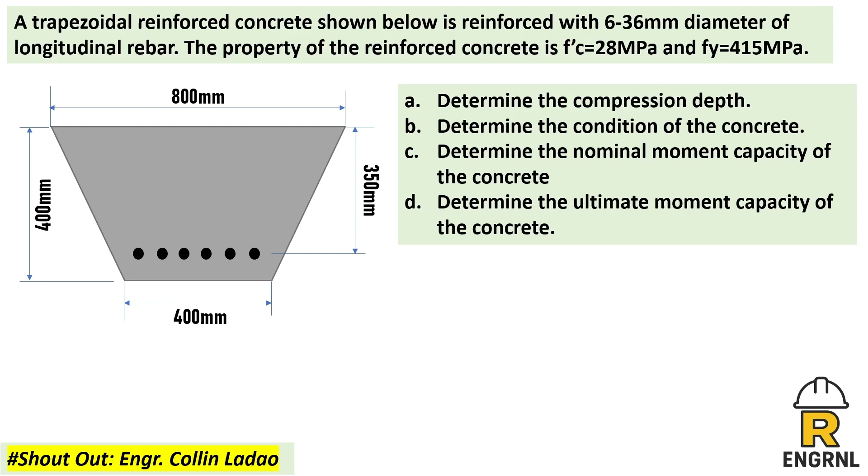Challenging ito, bro, pero sagutan natin. Una muna, kuwentahin nga muna natin yung AS. So we have 6 bars na 36mm, so we get 1944 pi. You can calculate using calculator.

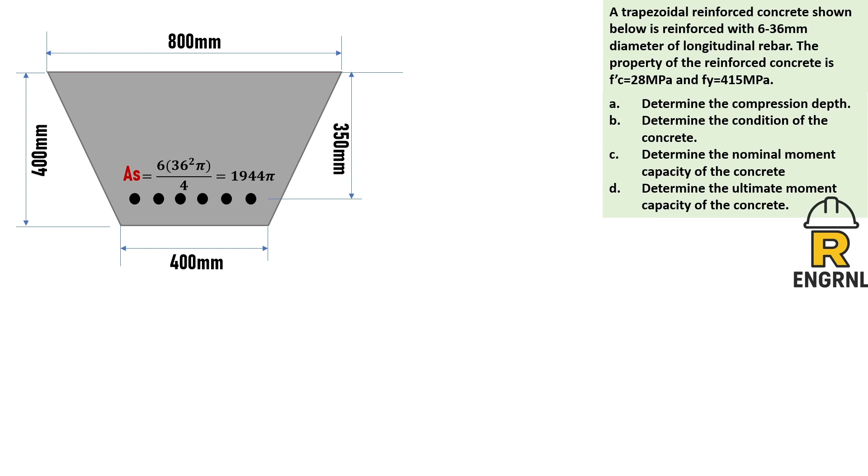Tandaan natin yung konsepto na kailangan mag-equilibrium yung force C at saka yung force T. Tandaan natin, meron tayong concrete block. Palagay natin itong shaded area is your AC, o the area of concrete. Dinra-drawing natin ang stress diagram. Itong concrete block na ito ay may height.

Yan yung hinahanap, yan yung compression depth. So we have this stress diagram, the concrete force o ang concrete stress, na may 0.85 F'c as stress. Yan yung ating compression force, is equal to the area of concrete multiplied by the stress of the concrete. And the tension side has its T equal to AS times the stress of the steel. Tandaan natin yan, from force over area, also stress. So equilibrium dapat yan.

Now for you to have the overview of the steps, we have 3 general steps for this investigation problem. Una, equate mo lang yung C is equals to T. Summation of forces along the horizontal is 0, equilibrium sila. So C is equals to T, tapos equate mo lang, substitute mo yung mga values natin: AC times stress C is equal to AS times stress S.

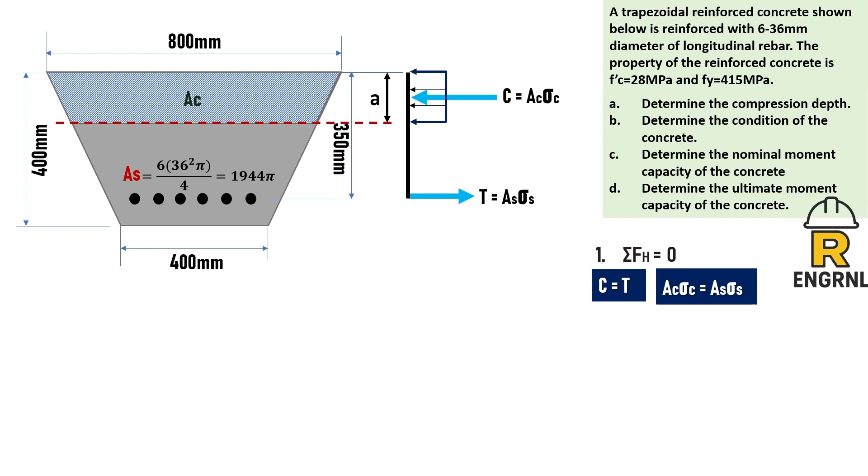Next step is to check whether your steel is yielding or not, by checking Fs. Kung rectangular beam yan, ginagamit mo itong mga analogies: kung Fs is greater than Fy, ibig sabihin steel yields, pwede mong gamitin si Fs as Fy, o Fy as Fs. Stress ng steel nga pala yung Fs. And if not, Fs is less than Fy, hindi siya yielding, so you are using the actual Fs or the actual steel stress.

Pag non-rectangular ang ginagamit ko, pwede akong gumamit o mag-assume na nag-yield agad ito. Pwede nating i-assume yun and find the height of compression block A, then check your Fs. Kung napatunayan na natin na nag-yield lahat, pwede kasi siyang maging transition region or tension control. Yun yung tinatanong sa letter B, anong condition yun. Mamaya i-check natin.

Kapag na-finalize na natin yung checking, ready na tayo to get our MN, yung letter C, using the moment equation, or taking moment at any point of C and T. Kunin lang natin yung moment arm dito and then taking moment. Yung moment arm ay D minus Y bar mamaya. Pwede natin gamitin yan either sa T o sa C.

Now let's do the first step. Nakalimutan ko, kapag MU, ita-times mo ng reduction factor yung MN para ma-solve yung letter D. Okay na, ready na tayo, simulan natin sa step 1.

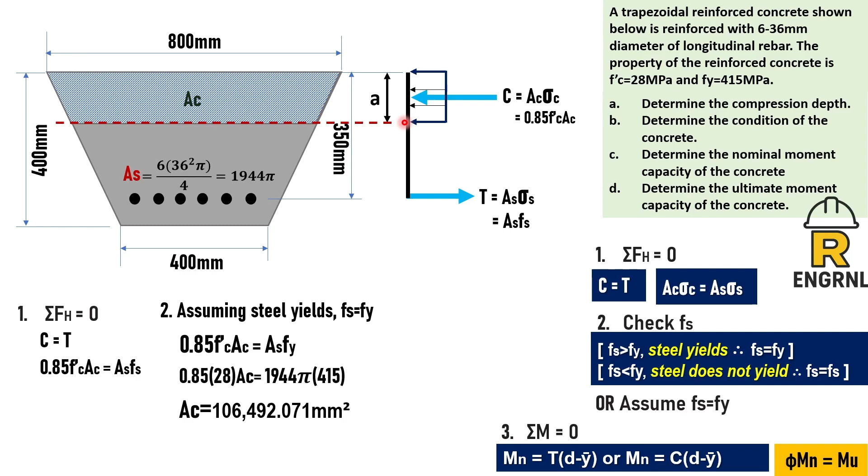I-evaluate natin ngayon ito. Using geometry, pwede natin siyang makuha. Tignan niyo lang mabuti itong gagawin natin. Ang goal ko ay makuha yung A, ang depth of compression block. Tandaan din natin na nakuha na natin yung value ng AC as 106,492.071.

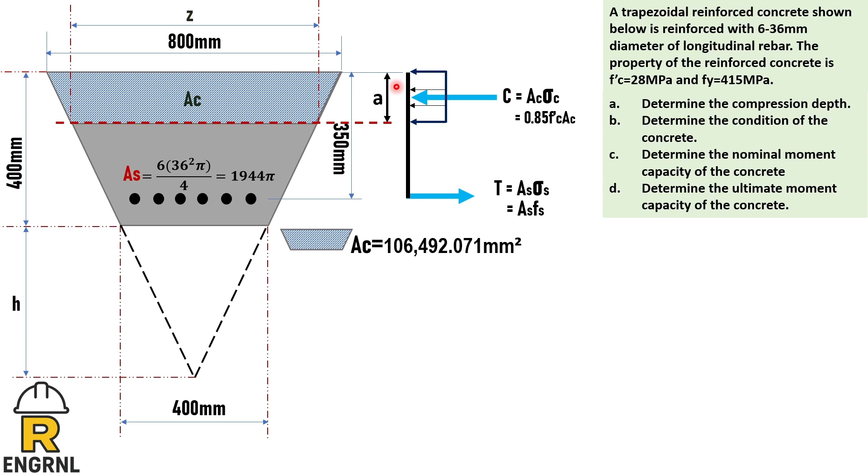So I want to get A. I'll do similar triangles first, solving for H first. Let this yellow color be the whole triangle. So this whole triangle has a height of 400 plus H, and its bottom is 800.

Next, I assume this violet triangle, which is similar to the yellow one. Its height is H and its bottom width is 400. So we can do similar triangles from these two triangles, and that's what we get.

So, 800 over 400 plus h, the ratio of the width over the height, is equal to the 400 width over the h of the violet triangle. Later on, we get h as 400 mm.

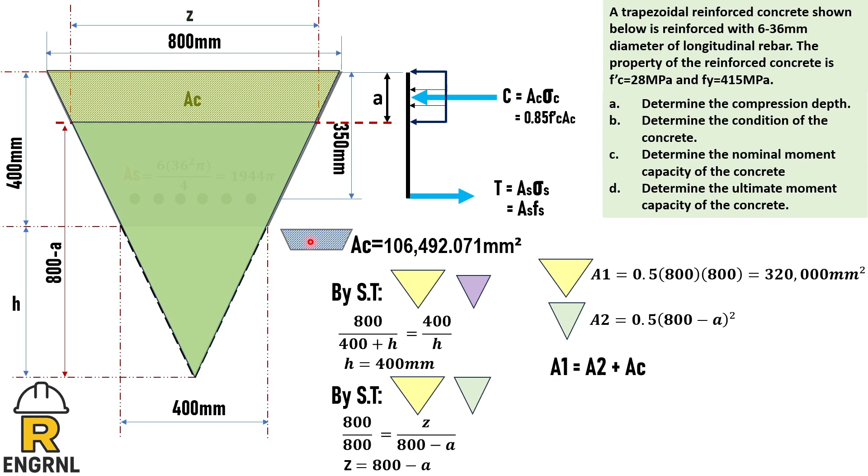So to summarize, this is the substitution, and now I only have one unknown, A. That is your compression depth, the height of the compression block. Did you follow? Yes, thank you.

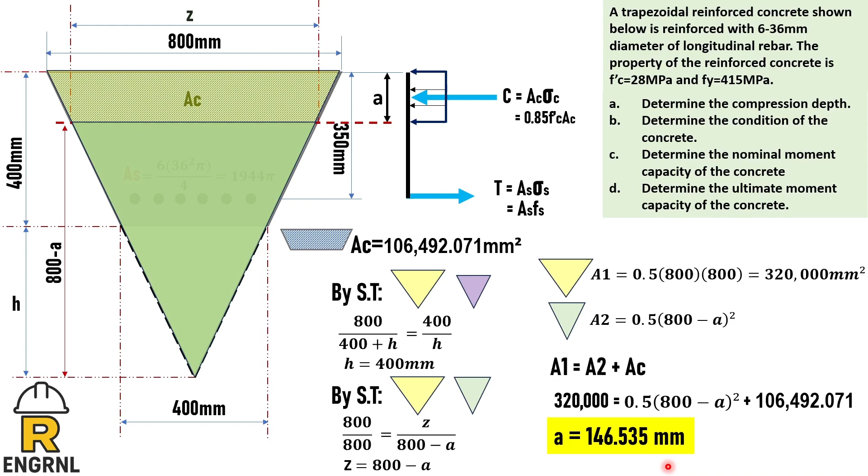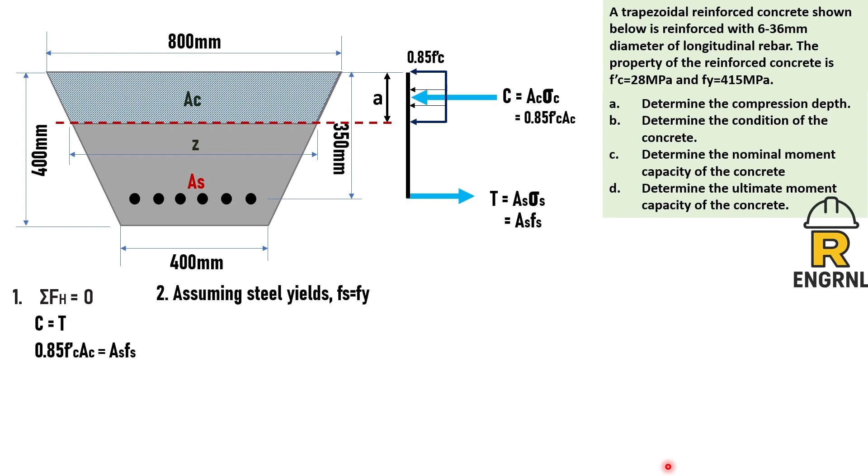So that is our compression block depth, A. Let's solve for A now. Let's check if our steel bars yield. We got A as 146.535.

Remember, we also have a formula here for concrete, C is equal to A over beta 1. That comes from A equals beta 1 times C, from NSCP 2015. So we can easily get C, and C is 172.395.

Now we will use C to check the steel stress, since we have a formula, Fs is equal to 600 times D minus C over C. If this Fs is greater than Fy, which is Fy 415, it will yield, and the assumption is correct. Let's check.

350 is our effective depth as given. This is the effective depth, from the centroid of steel to the outermost fiber of compression. So to calculate Fs, we have...

618.135. Obviously that is greater than Fy, therefore the steel yields, and the assumption is correct. Very good. So we don't need to repeat anything here since it yields, unlike when it doesn't yield, which gets a bit more complicated.

Now we also noticed that our Fs here is less than 1,000. According to NSCP, that is the transition region. When you're in the transition region, that relies on using a reduction factor. Actually we already answered letter B, determine the condition of the concrete, and the condition of the concrete is transition region. So let's proceed to the reduction factor since we can already get that. Why?

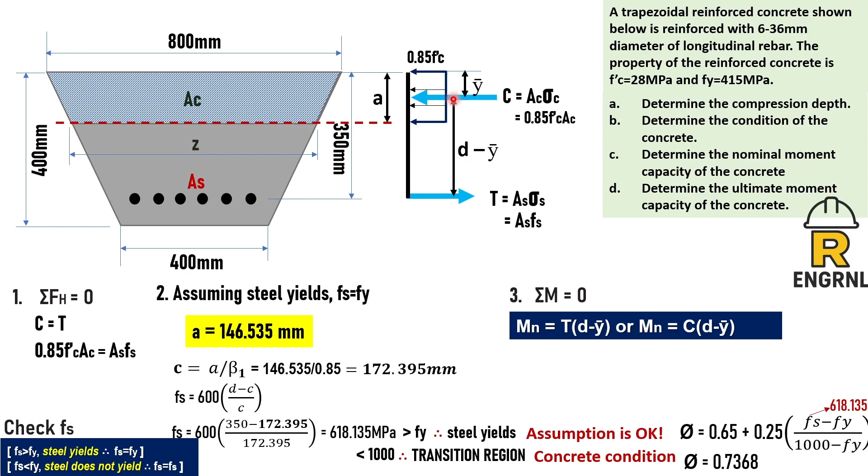Pagpalagay natin na yung pwesto ni C ay nasa centroid ng shaded trapezoid na ito, call it Y bar, wala sa taas, Y bar lang. Kunin natin yung Y bar mamaya. Tapos D minus Y bar ito, kasi effective depth to eh. Yung D is effective depth.

T times its moment arm, that is taking moment at C. So ang gagamitin ko, ito. I-substitute ko lang yung value ng T as As times Fy, since nag-yield naman na, nag-check na natin. So Fy na to, hindi na Fs.

Iwalay ko lang yung trapezoidal concrete block. Nakuha na natin yung height niyan as 146.535. Yung Z kanina is 800 minus A. So to validate that is 653.465. Meron na tayong legit na trapezoid dito.

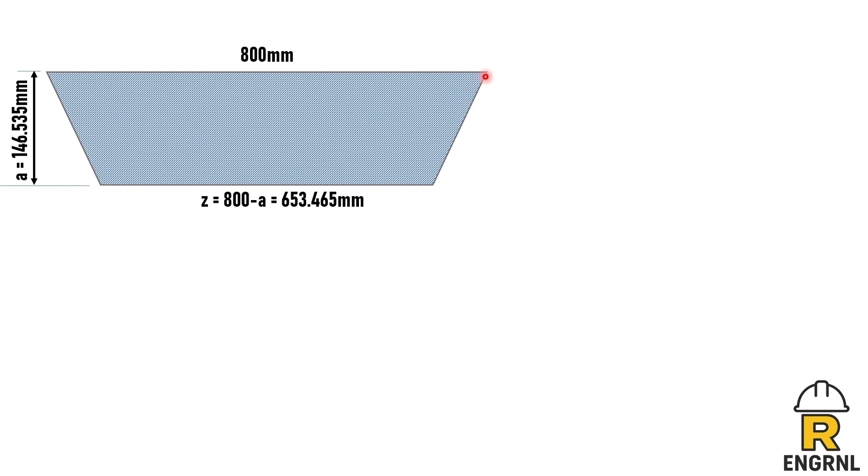Kunin lang daw natin yung centroid nito. Pagpalagay natin dito yun, yung centroid nun is Y bar. Bakit? Kasi kunin natin yung D minus Y bar mamaya. Kung meron kayong alam na formula ng centroid ng trapezoid, you can use that better, pero sakaling wala, we can derive for it.

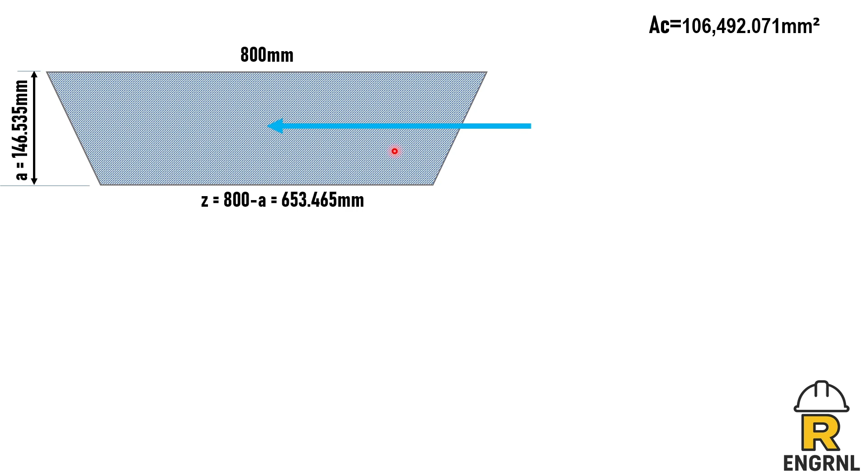Basta tandaan mo lang yung AC is 106,492.071, na nakuha natin kanina using the equilibrium equation. Tandaan mo na andyan yung centroid, dyan tatama yung compression force C. Tapos yung As, nasa baba yun, doon tatama naman si tension force. Basta yung C natin nasa Y bar position from the top. So this is your D minus Y bar.

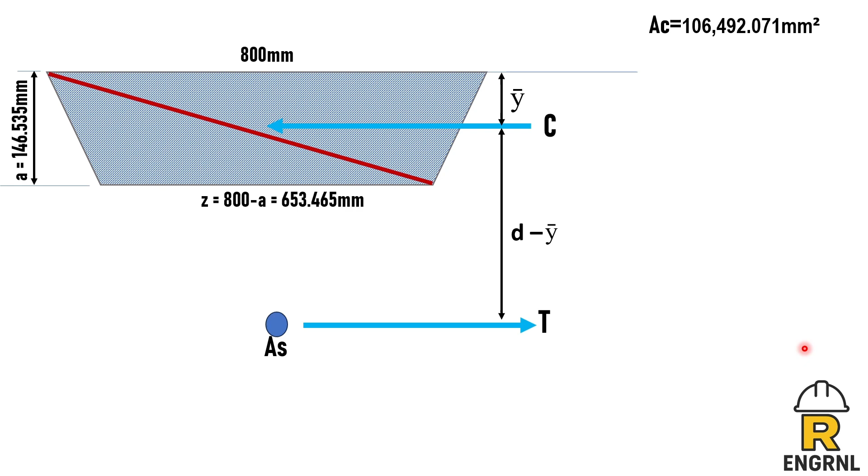Pwede ko tong ihati. Ganito ako manguha ng centroid ng trapezoid: hatiin ko sa dalawang triangle yung trapezoid na to, call it A1 and A2. Pero as one compression force lang kukunin ko, Y bar lang, isang centroid lang po.

Using Varignon's theorem, ang theorem na yon says that the total area times the centroid, yan yung Y bar, is equal to the area 1 times its centroid from the reference plus another area times its centroid from the reference. Yan yung Varignon's, we can use this. Basta tandaan mo na yung AC is the total area, and that is A1 plus A2.

Now, calculate A1. Tandaan mo, itong triangle na to, yung A1, may height siya, ito yung height niya, yung A, yan din yung height niya. Kaigihan na ganito yung pagkakahati ko, kasi given na yung mga dimensions. Ang width ng triangle is 800, so ang height niya is A. So we can use this formula.

1/2 base times height, 800 ang base, height is 146.535. So we have A1 of 58,614.198.

Ganon din sa A2. Ang kaigihan sa A2, kitang-kita mo din ang base mo is yung Z, tapos ang height mo is the same, 146.535 din. Property of triangle yan. So we can use 1/2 base times height din sa area 2.

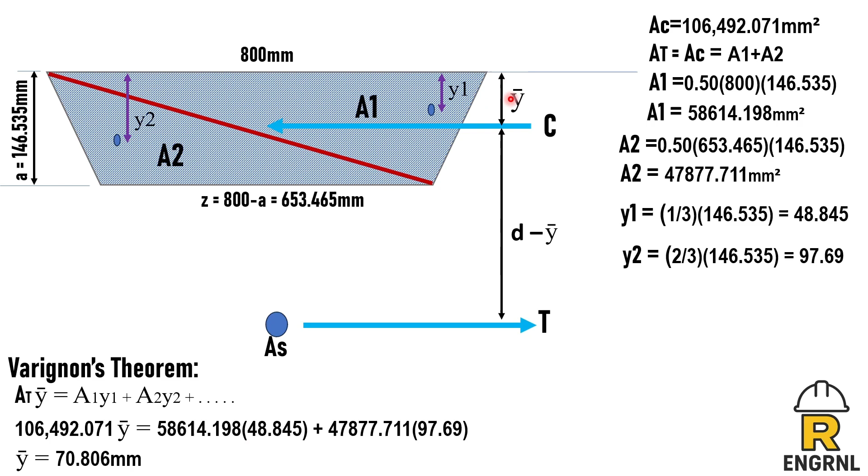97.69. So pwede na nating sundan o makuha yung Varignon's theorem na to. So we can substitute the whole values. And we have this Y bar, 70.806 mm. Nasundan? So pwede ko nang gamitin yun, Y bar dito, 70.81.

Using your calculators, you will calculate MN na, which is 707.622 kN meter. Dinivide ko na po yan ng 1,000 squared. So letter D na lang: determine the ultimate moment capacity. Gagamit tayo ng MU is equal to reduction factor times MN. Using yung nakuha nating reduction factor kanina.

0.7368, transition region po yun na. Substitute na, at yan na siya: MU is equals to 521.383 kN meter.

Medyo challenging tong problem ni Colleen, no? Shout out sa'yo, bro, Colleen Ladao, thank you for this problem. So yun po yung ating non-rectangular trapezoidal concrete, hinahanap natin design capacity nito.